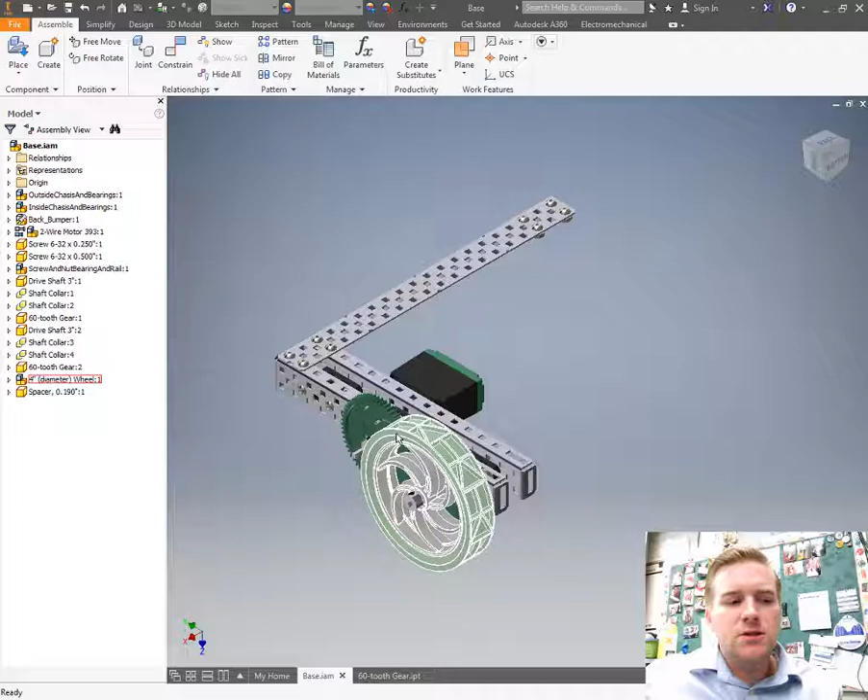Hello, in this video I'm going to demote this wheel first, and then I'm going to start placing planes on the gears to get them ready to align so that we can align the teeth together and turn the wheels and gears together. Let's go ahead and get started.

The first thing I'm going to do is demote this. I'm going to hold down Shift and click on all the parts that I have here. Oops, I forgot the drive shaft, so let me do that again. Push Tab on your keyboard and then call this the wheel assembly or whatever you like. Go ahead and save that in the assemblies file.

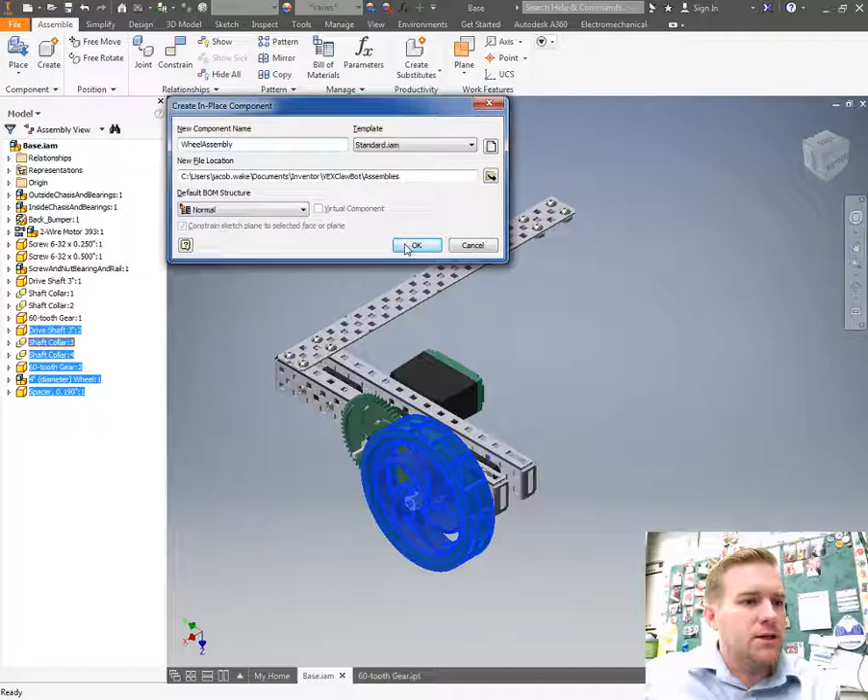Next thing I want to do is right click on this gear and open it up in its part file, and now I'm going to make some edits.

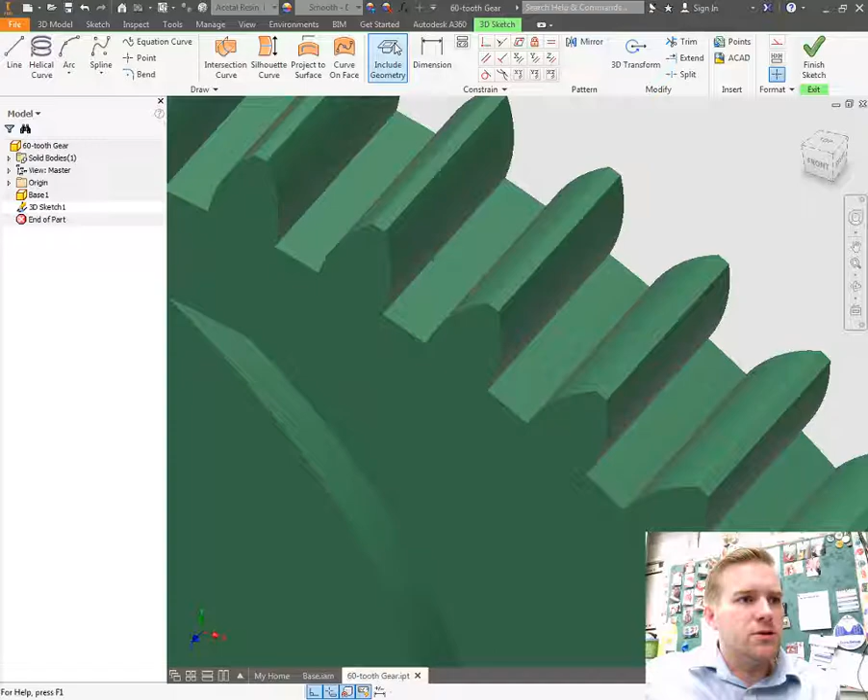The first thing I'm going to do is start a 3D sketch, so I'm going to click on Start 3D Sketch. I am going to include some geometry here. I want to make a 3-point plane, so I need 3 points to do that. I'm going to create a line here, and then a line across here, but I can't include that as geometry, so I have to create it by making 2 points. I'll make one point in one corner, another point in another corner, and draw a line across those 2 points. Hit Escape. Now I have my 3 lines which I can create a 3-point plane from. Finish Sketch, and that'll create my first plane.

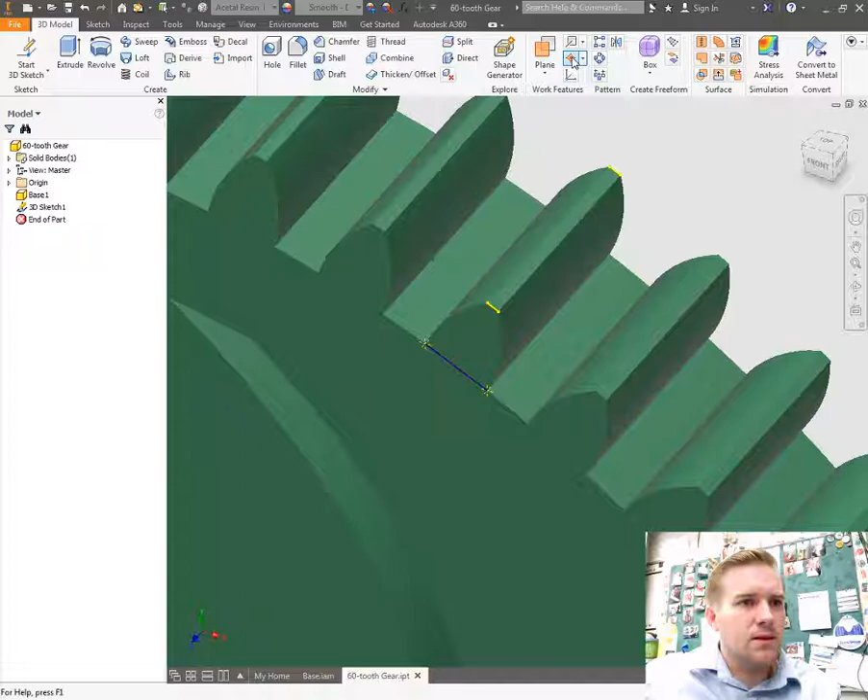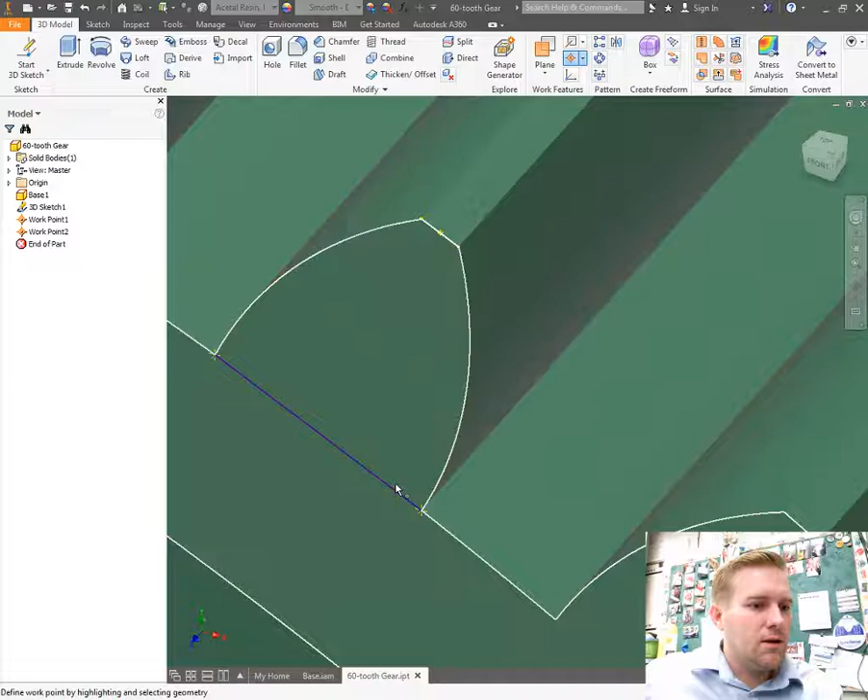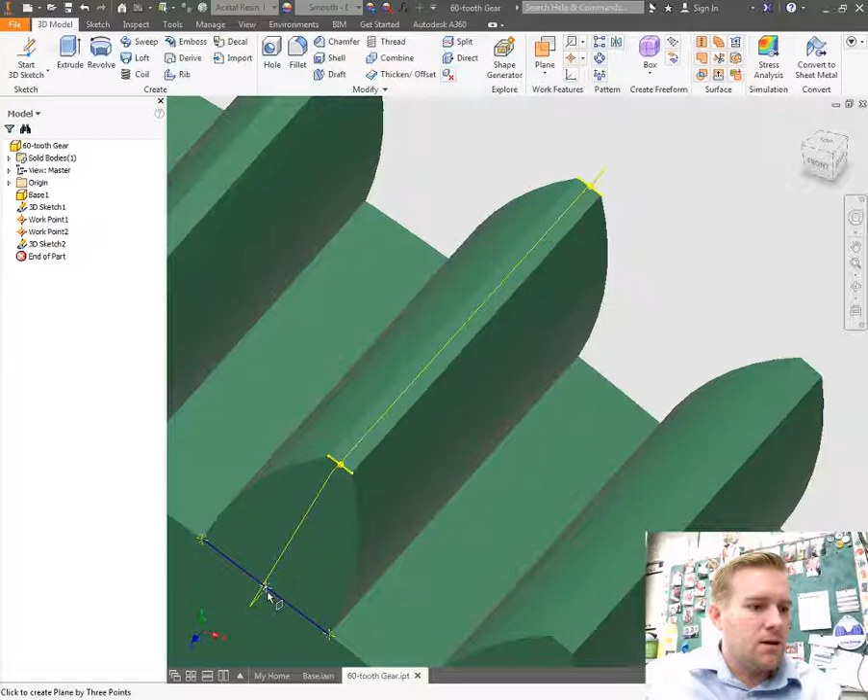Go over to Plane, and we're going to create 3 points here that the plane can use. You'll notice it locks in on the center point. So point 1, click on point again, point 2, click one more time, and that will create... oh, it does not. Let's go ahead and start a 3D sketch again and create a center point here, and it'll turn green when it's centered. Now we have our 3 points. Finish Sketch, go to Plane, insert 3-point plane, and use the 3 points we just created to make a plane. Now we'll use this plane to align our gears.

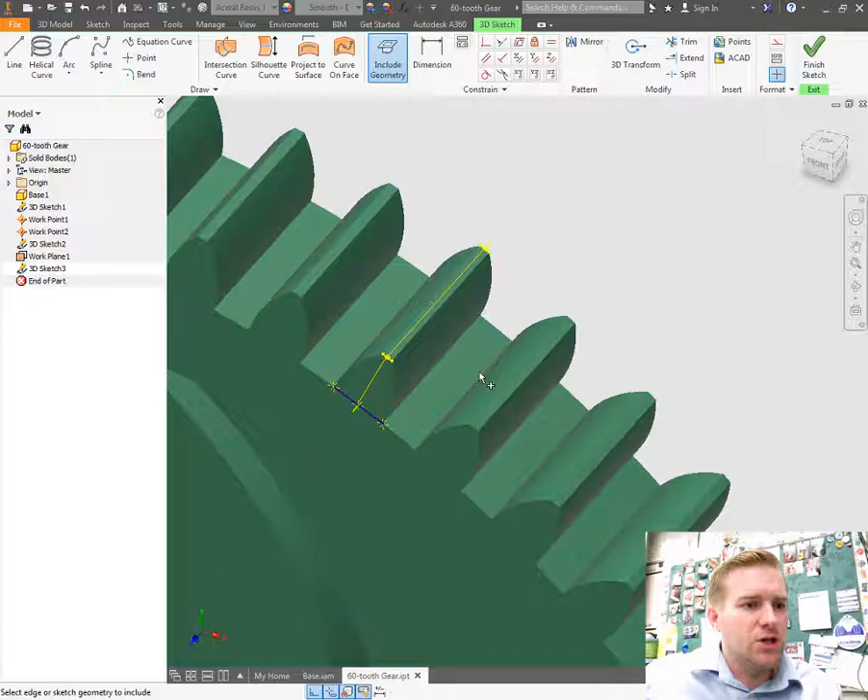The next thing I need to do is create another plane in the trough. I have a plane on the tooth, and now I need a plane on the trough because we're going to align one tooth with one trough. So create another 3D sketch, include geometry, and I'm going to include this line and this line, and that should be it. Finish Sketch, and you'll notice the center point came up in the middle of the gear here.

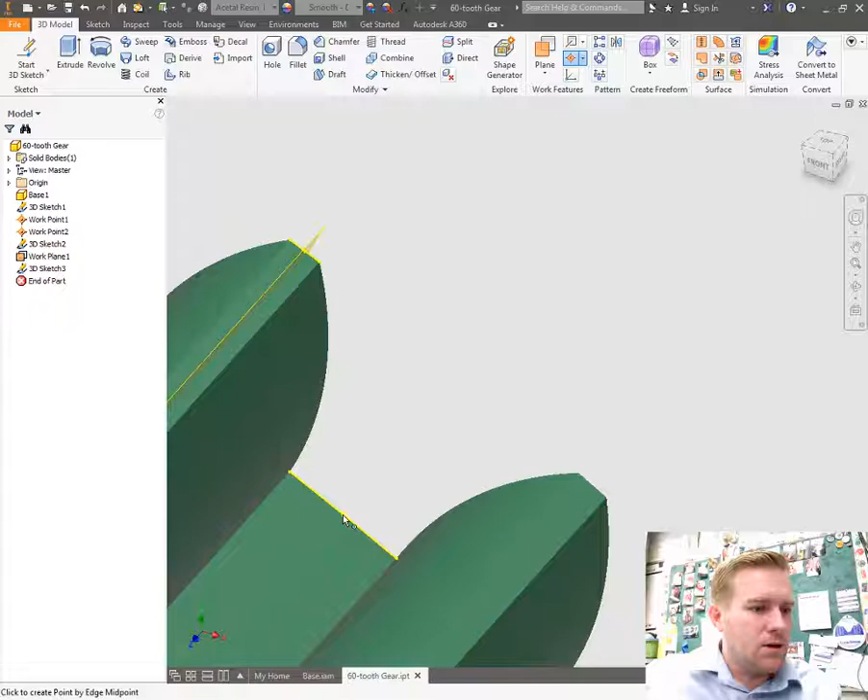Let's go ahead and create a 3-point plane. Create 3 points again: point 1, another point, point 2, and then we have the point in the center of the gear that we're going to use for our next plane. Now click on Plane, 3-point plane, and use those 3 points: 1, 2, and 3, and that'll create those planes for us.

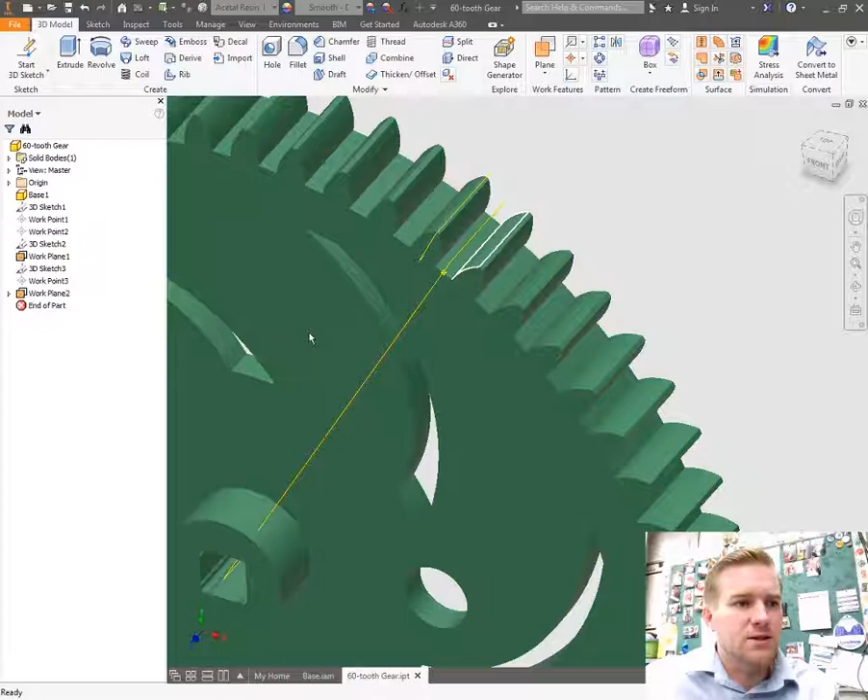Now let's just do some cleaning up. We're going to get rid of the sketches and work points. Right click on those and uncheck visibility, same with the sketch and work point here, but we want our planes visible on the 60 tooth gears. Go ahead and hit Control S and save it. Go back to your base, and when you look at your gears, you'll see those planes start to appear.

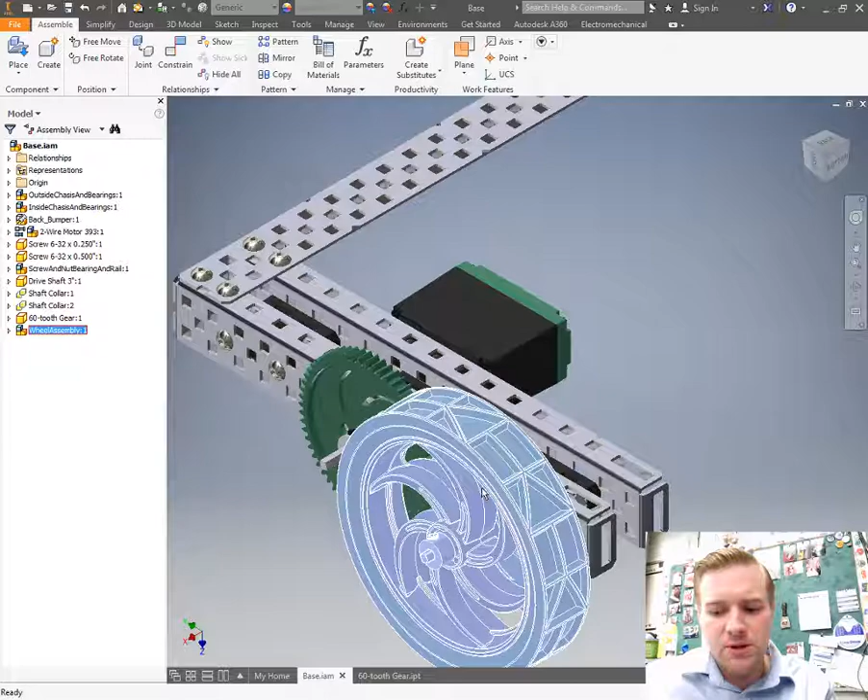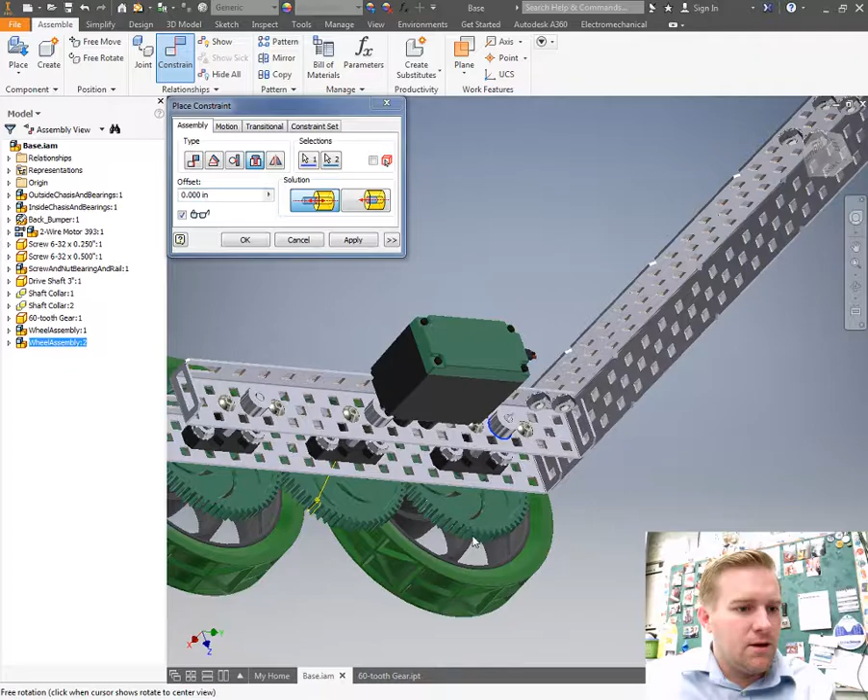Now we have to place our last wheel and start aligning those planes. I'm going to click on my wheel assembly, Control C, Control V, paste that, and rotate the screen around, do an insert constraint on the edge right here, zoom in, grab the edge right here, hit apply, and now we have all of our wheels in place.

Click on the home button so we can get back to where we are. Now the wheels are kind of in the way, and I'll show you in the next video how to align the gears and get them turning so we don't have too long of a video here.